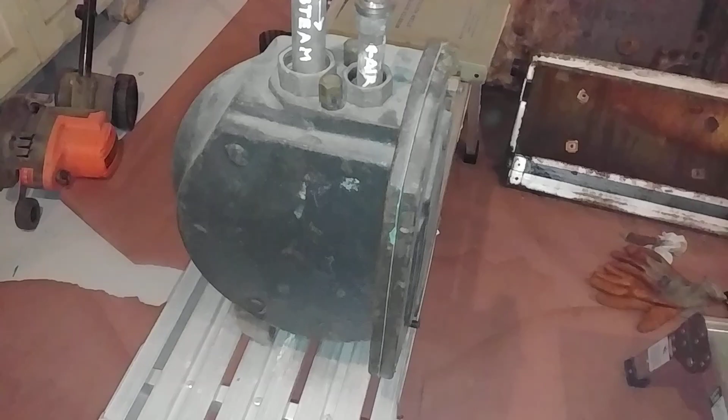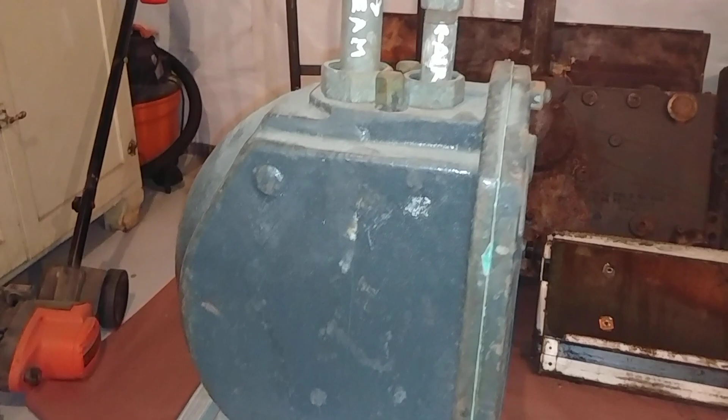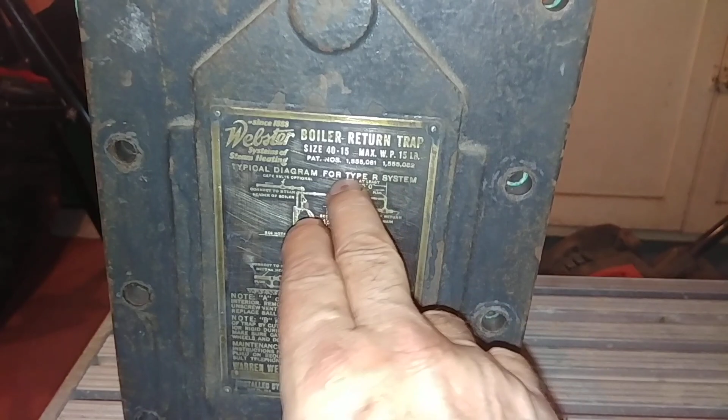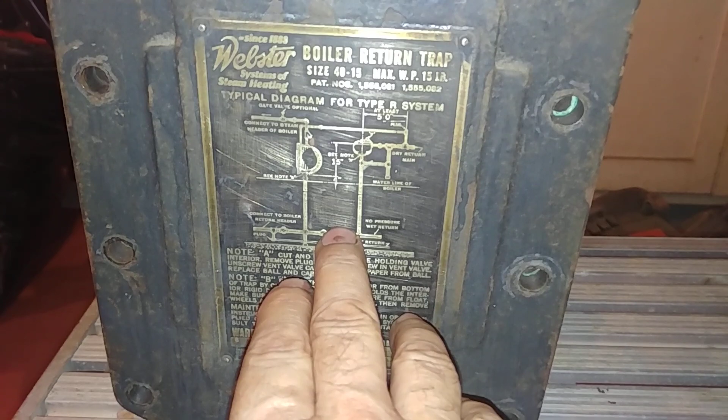Hey, so what you see before you is what was colloquially referred to as a canned ham, which is an artifact from the coal era. I've got it disconnected from the system since we're going to be using a vapor stat, and this really is not necessary. So it's a boiler return trap. It says 4015. There are the patent numbers and a basic diagram of the installation and the unpacking instructions and maintenance on this unit.

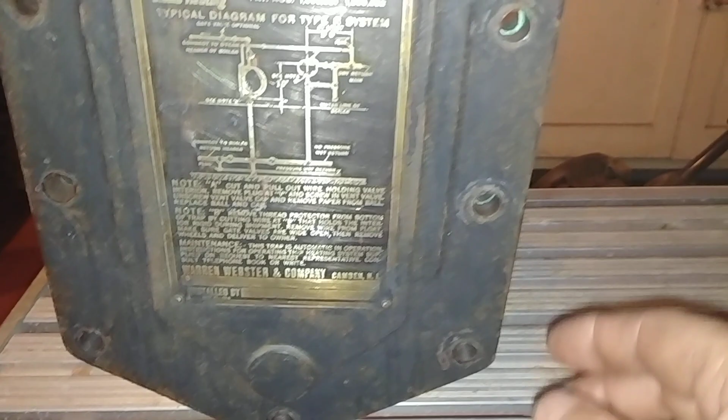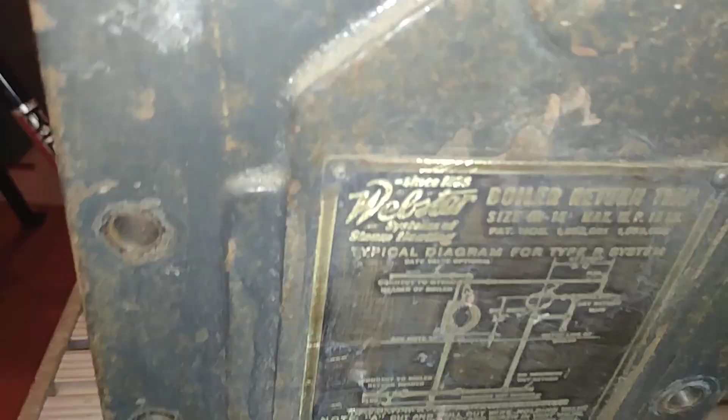I've gone ahead and removed the bolts. I've got one stud coming out of here. It's got a bolt on it, and hopefully when I remove this it won't fall into my lap. I'm doing this one-handed here. I'm going to let the nut fall, and this plate comes off. Show you what's inside. There we are. And I'll put it down there.

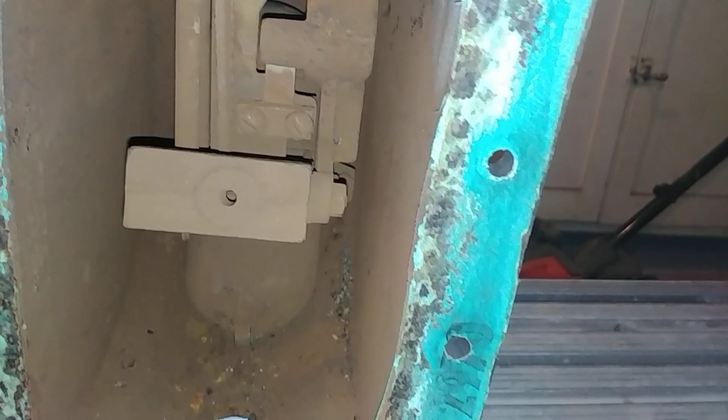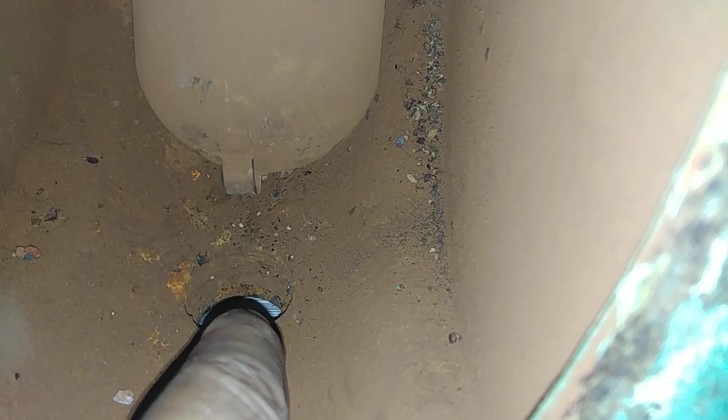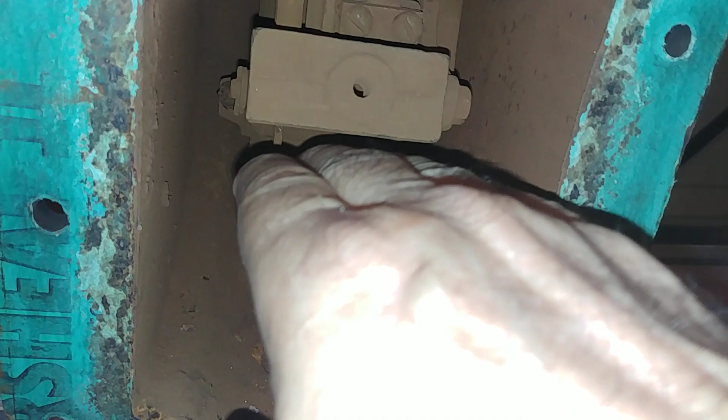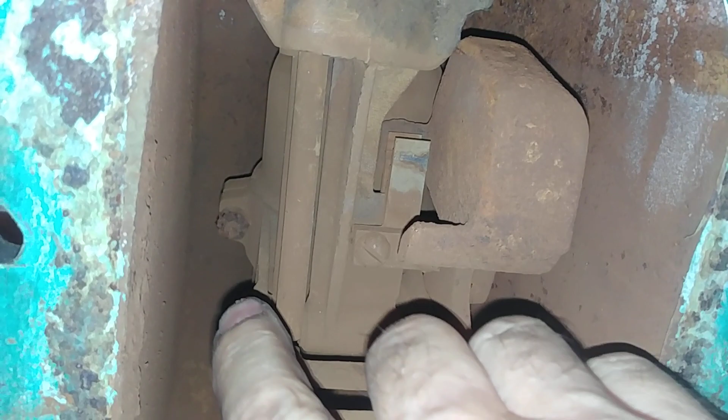This is what's inside. Now somebody else has come along later, probably when the boiler that we're removing now was put in. They put in this relatively new gasketing material, non-asbestos type, and that's the inlet where the water comes in, and when the pressure of the system gets too high, the water level will rise up in this container, and there is a float back there which rises up and trips these rods there. You can see them moving back and forth. This is a counterweight, little spring to hold it. Get another shot of it there.

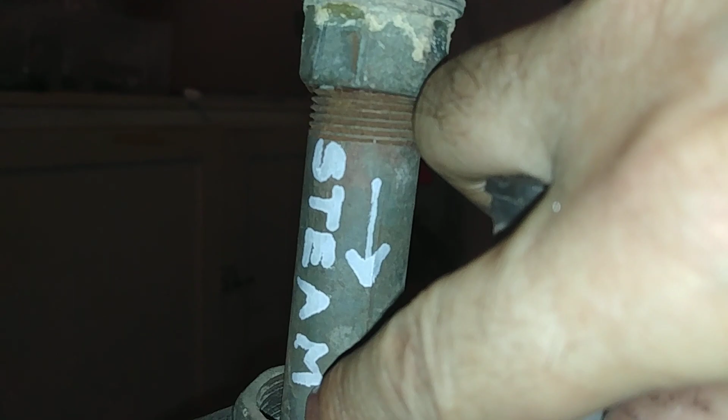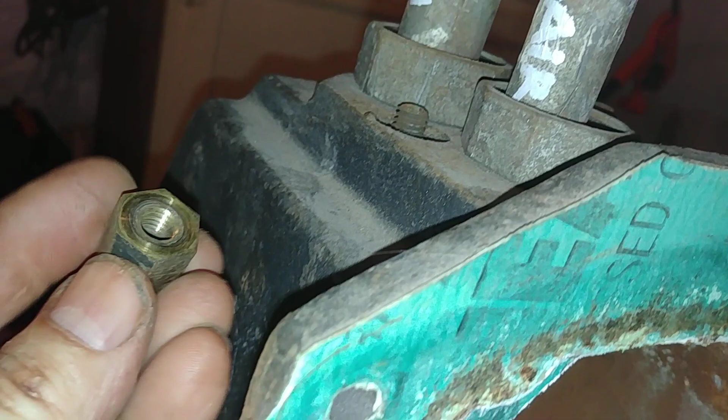All right, now, so this is the steam inlet. This is attached to the header, and this is the air outlet. Obviously, I've marked it for you to go to the vent on the float return. So these have been loosened previously. Let's see if I can get this one off. All right, there we are.

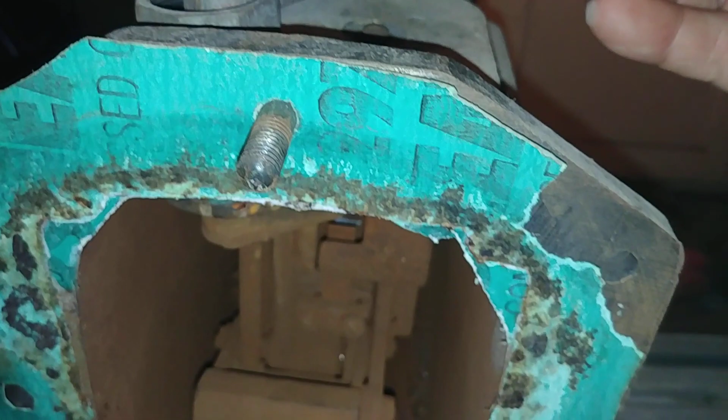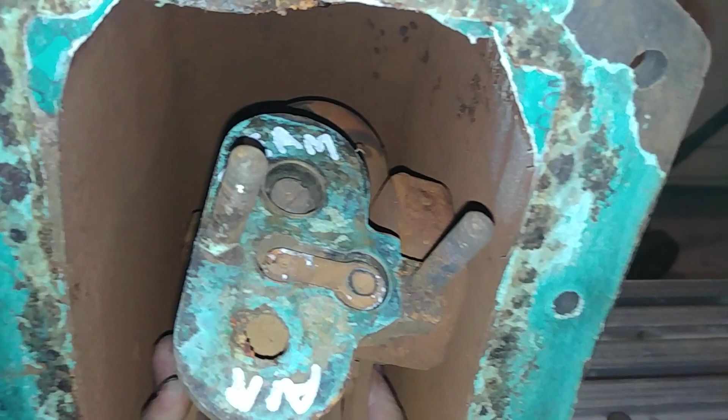And now I'm going to get this thing out of here. There we are. And so there's the gasket. Let me get a shot of where it came from. The back one is where the steam comes in, and the front one is where the air comes out. So let's take a look at this mechanism. I've labeled it for the steam inlet, and there is where the air outlet comes.

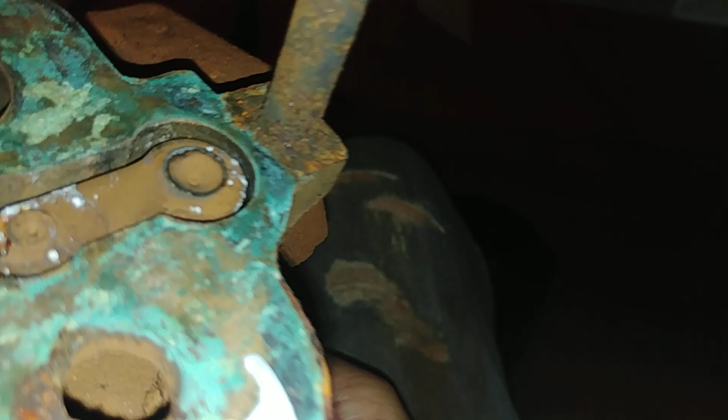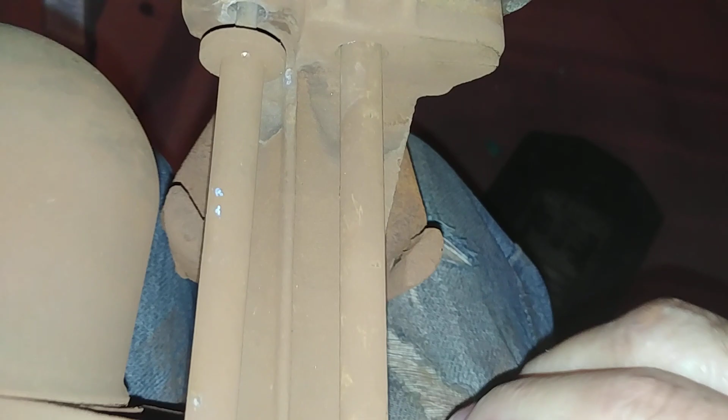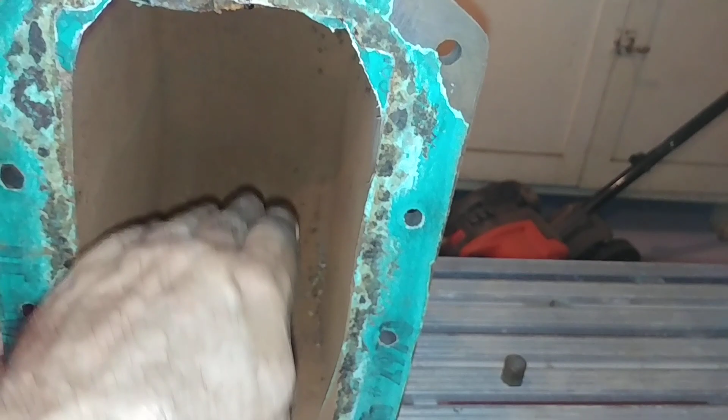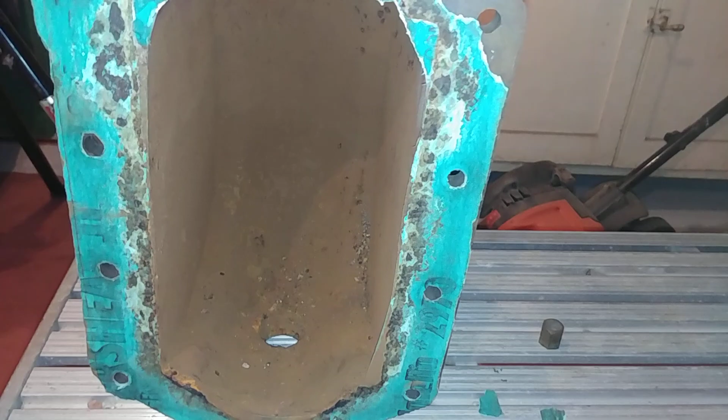And I'll see if I can show you this mechanism. It's a little awkward. This rises up and down, and that's where that seals against the steam. The steam pressure is coming in on the top of that and pushing down on that, and when the float trips up, it opens this and allows the steam to enter this chamber and push down on the water that's inside. Now what that does is that equalizes the pressure and then allows gravity to let the water go in against the two check valves. And I'll show you the diagram with the check valves in a bit.

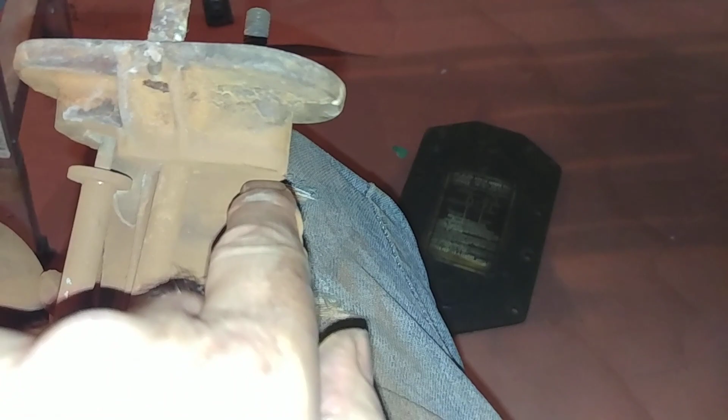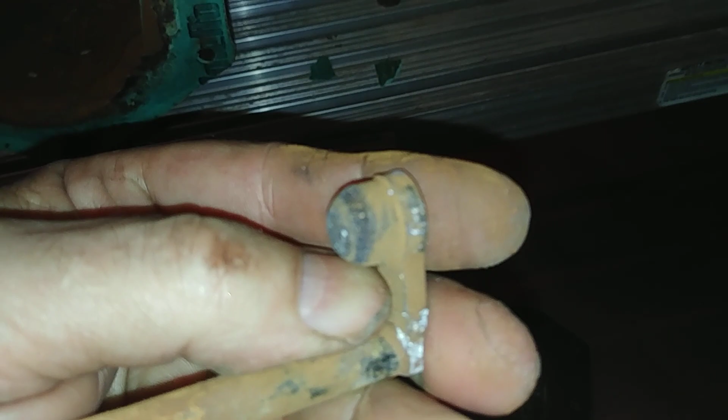So that's your steam in and out, and this is your air vent here. So steam pressure might be here and push down on this. And that allows the air to go in through here and then out through there. I hope you can see that. Let me pull this out for you. That's the seal for the air. The actuating rod, lift lever. This does not come out too easily. Get you another shot at the top.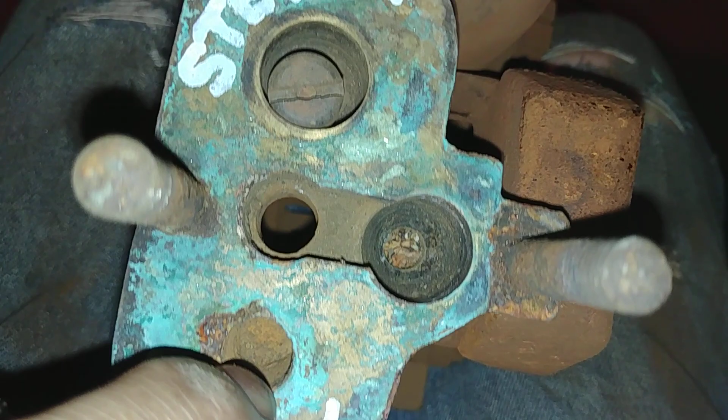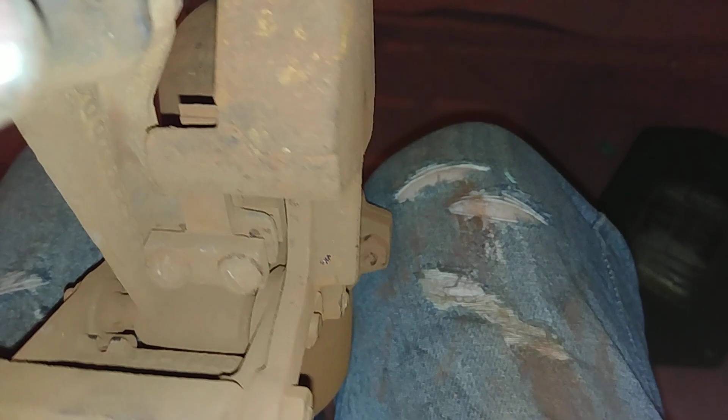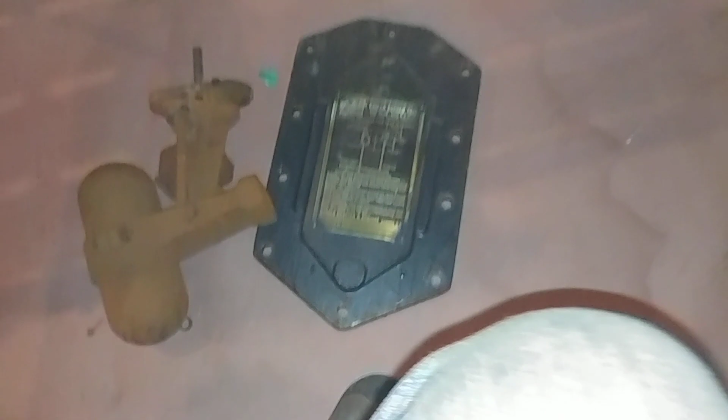And so this connects with this space here. And these are the two bolts that go up at the top there. I hope that was clear. See some stuff down in there over the years, so the float goes back and forth like that. Get you another shot. All right, so I think we've covered that as well as we can. Yeah, that's overall shot.

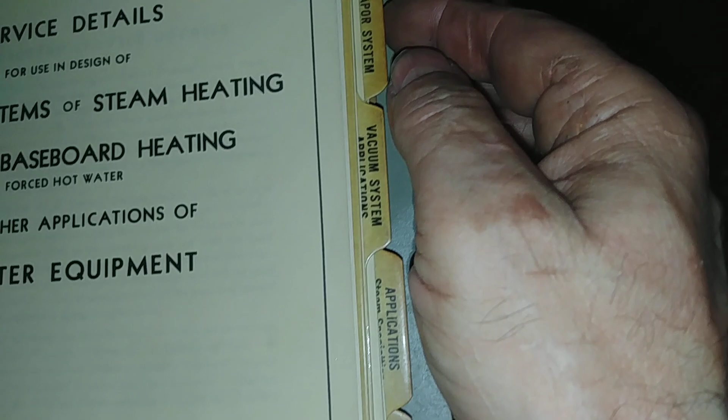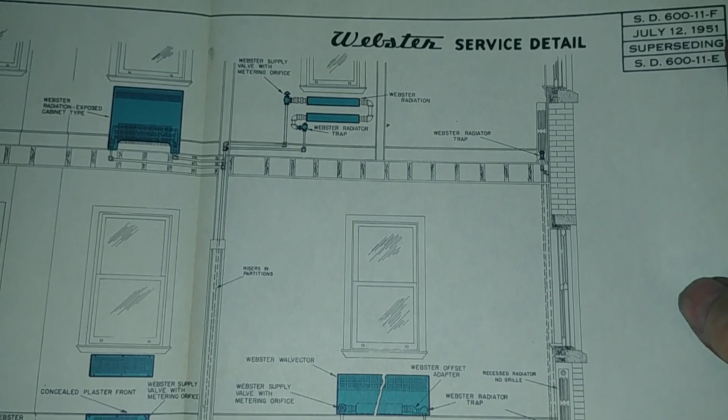Okay, so the algorithm is telling me that most of you are gone by now. So for you, for your extra treat for sticking by me, we have here service details, Warren Webster Systems of Steam Heating. Warren Webster and Company, Camden, New Jersey. And this is copyrighted 1953. And we're coming here, let's tab on the vapor system applications. And feast your eyes on this. Service detail. This is based on a drawing from 1951, July 12th to be exact. And that is how it's supposed to be piped in.

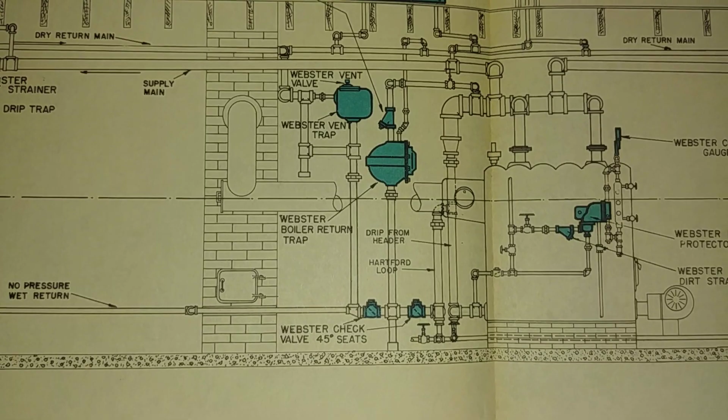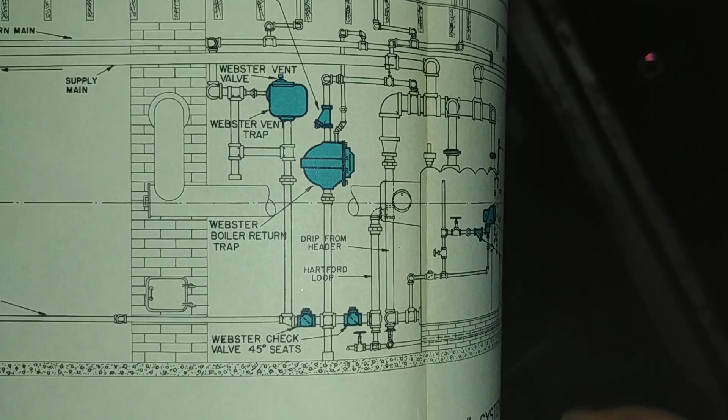See the boiler, which is an oil-fired boiler. There are the two check valves and the vent valve where the air is eliminated, and this is the return trap as we discussed. And this is the water level, which is supposed to maintain. So if the water level gets too high, the pump will activate and allow the water to then be cycled back into the boiler. And the main traps, wet returns. We get another close-up.

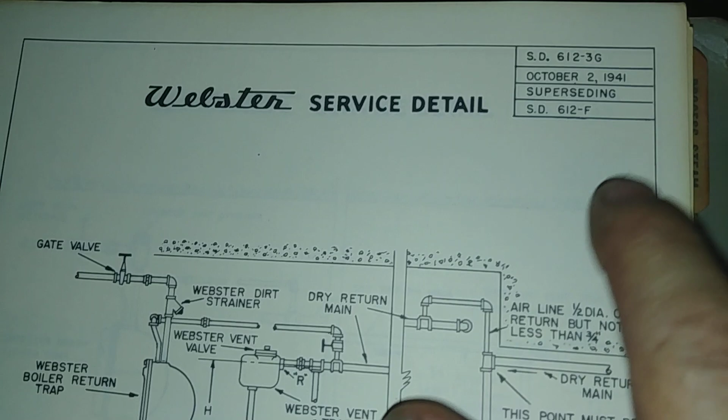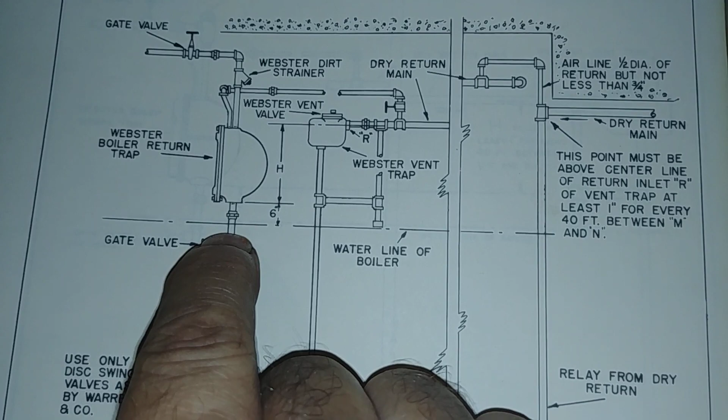This is a drawing based from 1941. Service detail. There's your return trap. There's your canned ham, as it were, and your vents. That's the air vent, and that's the steam vent there. And this is the water line 6 inches below the inlet of the device, the bottom inlet of the device, and just as important that these check valves here, which allow this to return. And there are various other permutations of where this is supposed to go. There's your vent trap. Discussed that in other videos.

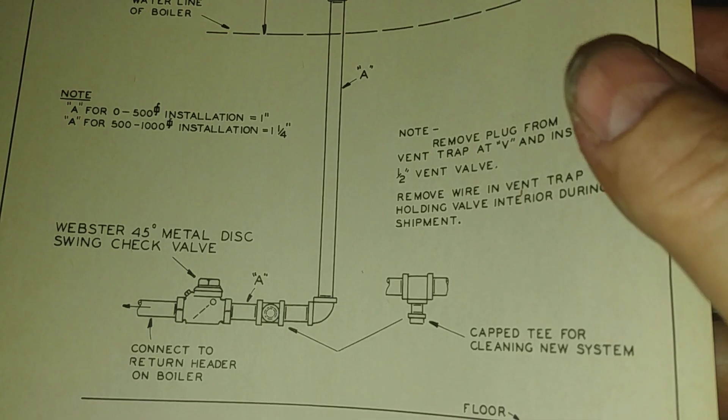And there are a lot of drawings and so forth. They were very attentive to the details. And it goes on. But I think this video has gone on long enough.